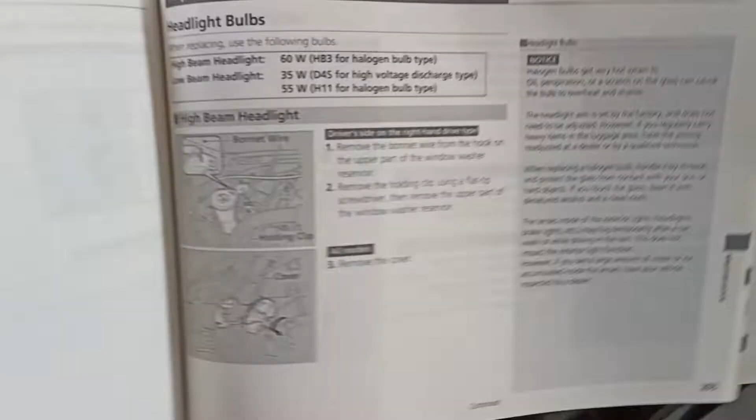Go to the Honda CR-Z owner's manual and turn to page 293, and there you have it.

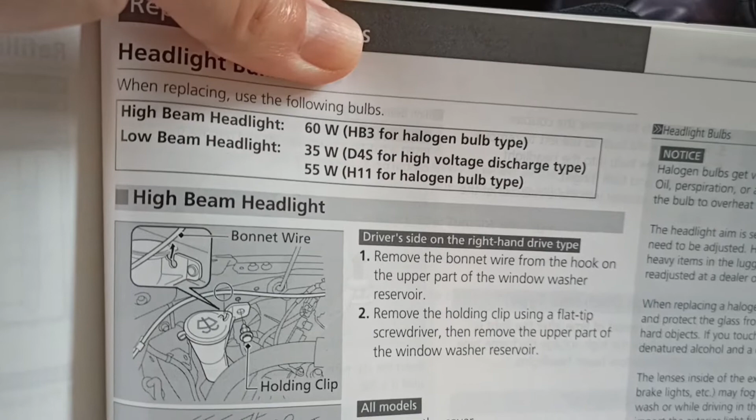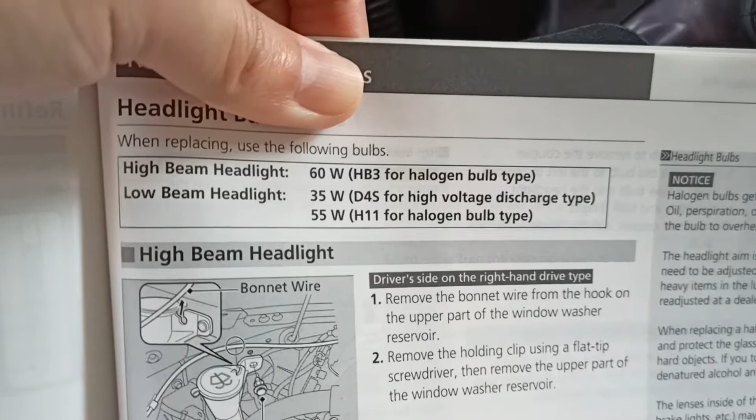The high beam uses the HB3, and of course this car has two models: ZF1 and ZF2. Currently I'm using the ZF2 version, which comes with HID, using the HID D4S.

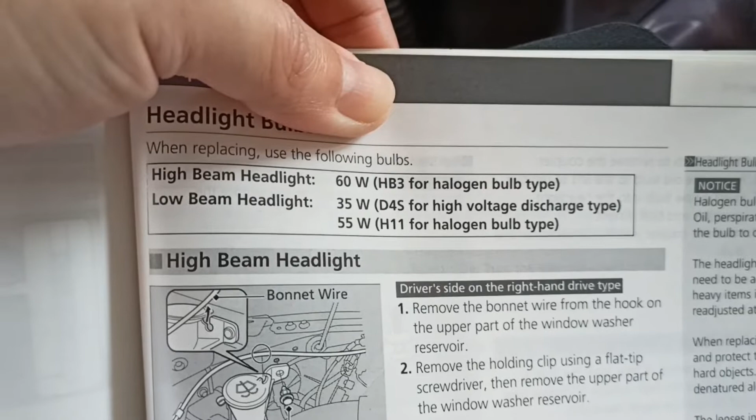The other version actually uses the H11 halogen bulb. Clearly this one is the D4S version.

The D4S version will look something like this. Let me turn on the light for you guys to see. So this is the type which uses the D4S, also known as the HID.

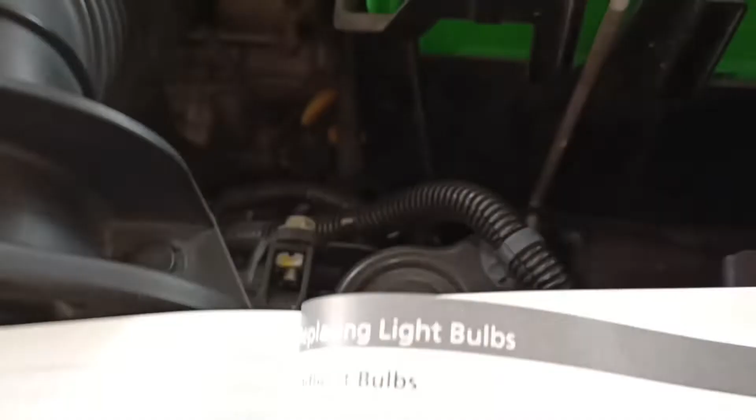So this is the D4S HID, and this is the normal bulb, as you can see, which uses the HB3, or the equivalent HB4, also using the same type.

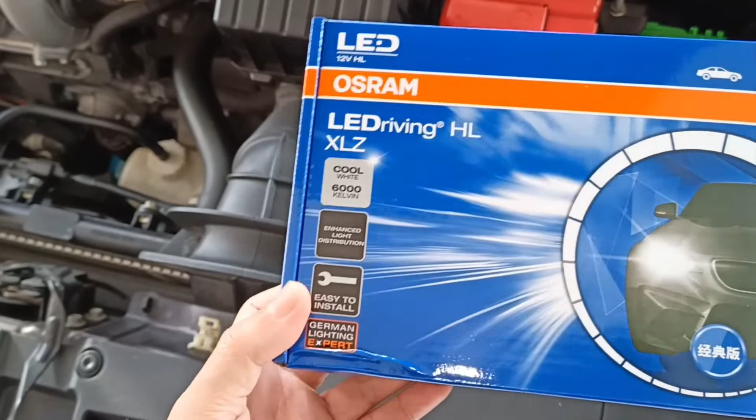Today the HB3 high beam light I will change to an LED. As you can see, this one is the HB3 LED. So currently the light is using, let me switch off the lights first.

It's actually using the bulb. As you can see over here, it's a bulb type, so I'm going to change it to an LED.

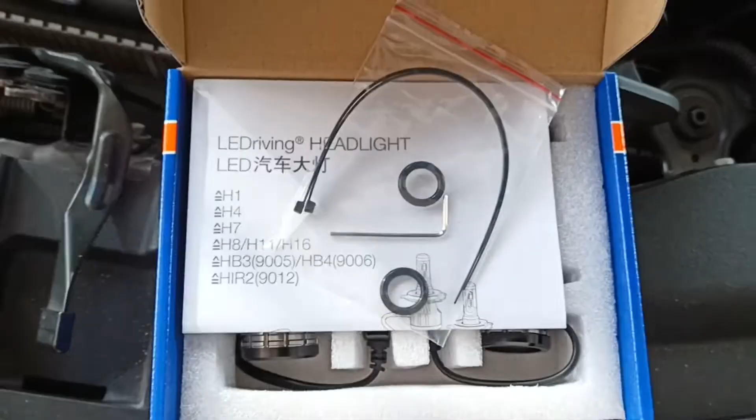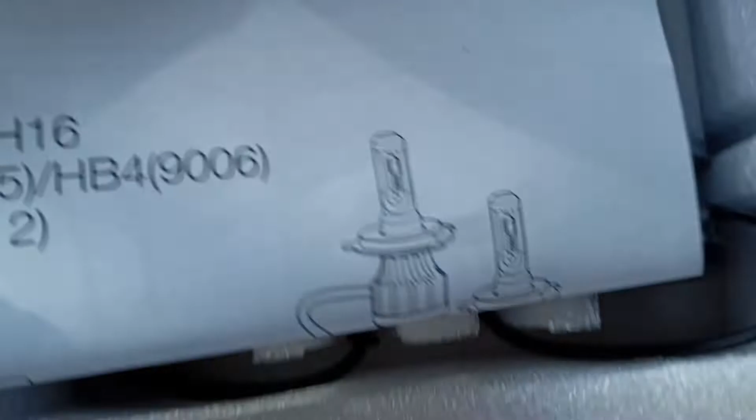To introduce the LED that I got over here, what's given is actually a cable tie, two O-rings, and an Allen key to adjust the location of the LED.

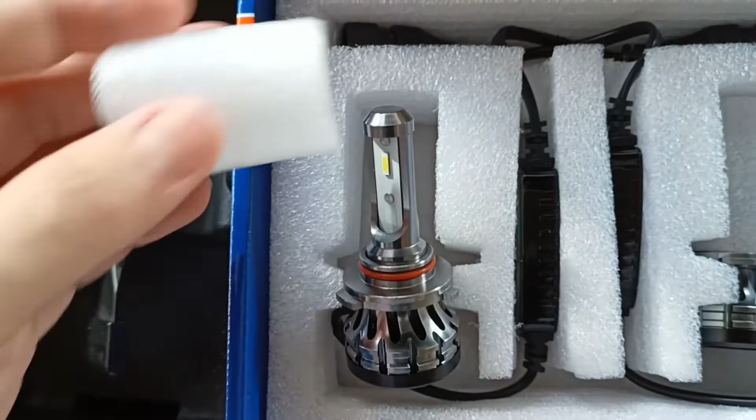Manual, and there you go. Very lovely LED, nicely protected. It comes with a ballast, and that will be the connector that they gave, which is hopefully a standard one.

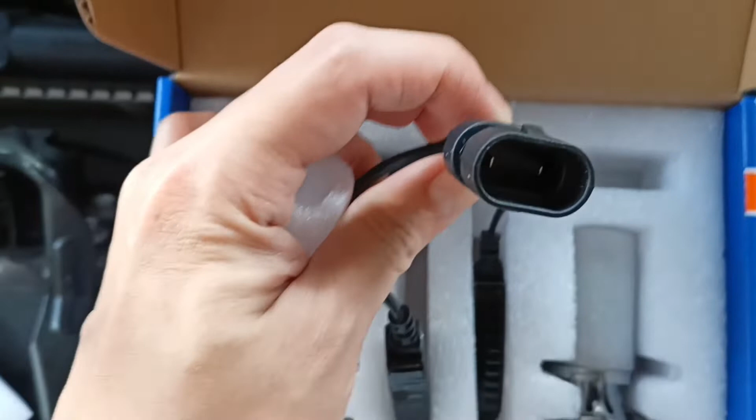Okay, step by step how to actually take out this high beam bulb. So go to here, this is one of it. The other side is actually more difficult.

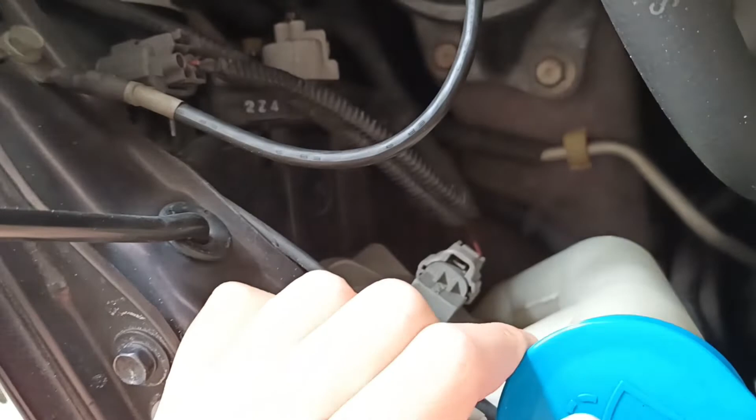This side you need to be taking care, since it's a right-hand drive car and it's quite near to this thing, so it's quite hard for you to turn, but we will do the video for this one, which is much easier.

Okay, by doing so, this is out, it looks something like that. Next what you're gonna do is turn counterclockwise. Okay, this is a better view. All you need to do is turn counterclockwise using this tab over here and here.

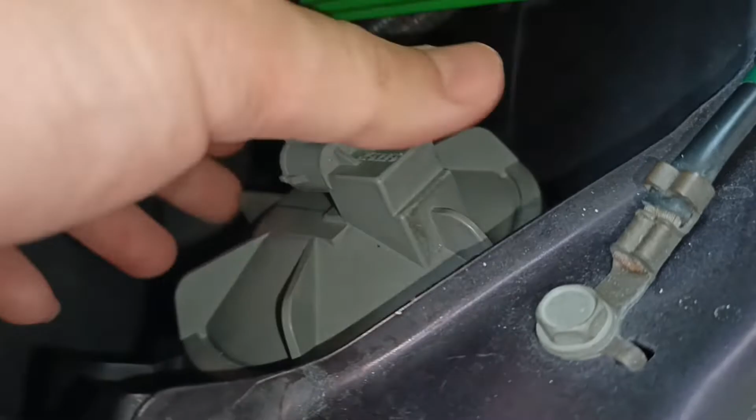Turn it counterclockwise, and then use the screwdriver that you have and give it a turn on the side.

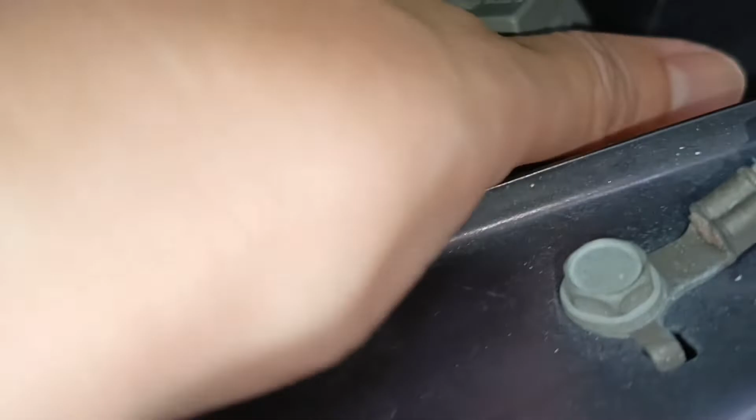Or if your hand has a better grip, what you need to do is just yank it up like that. Yeah, yank it up. So be careful.

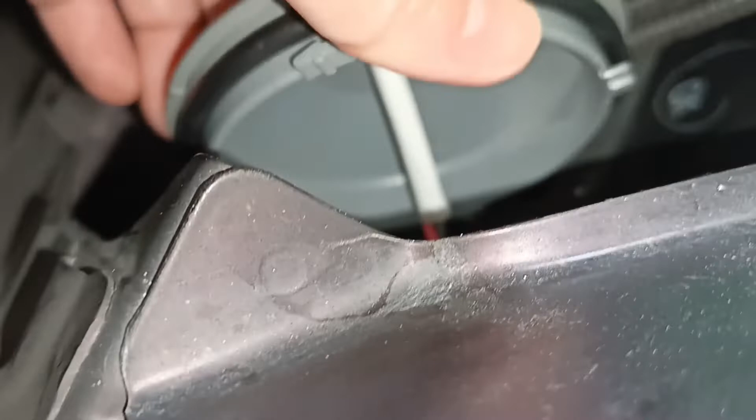There's a wire coming out over here. So let's say you yank it out, the wire that is red in color is connected to number 1 on the casing on this side.

Later I will show it to you. Okay, it seems that this wire is quite attached to the casing itself.

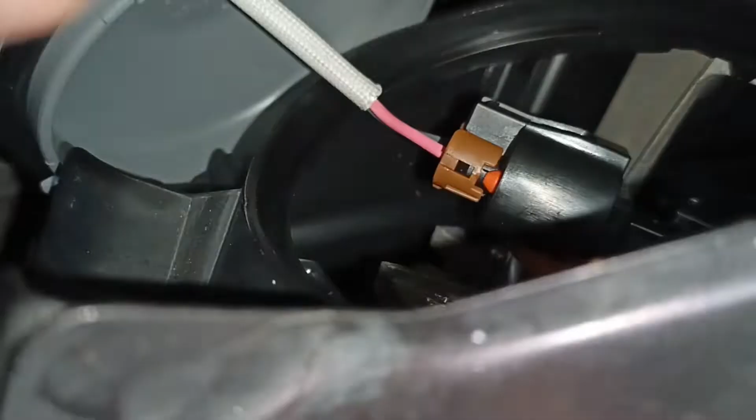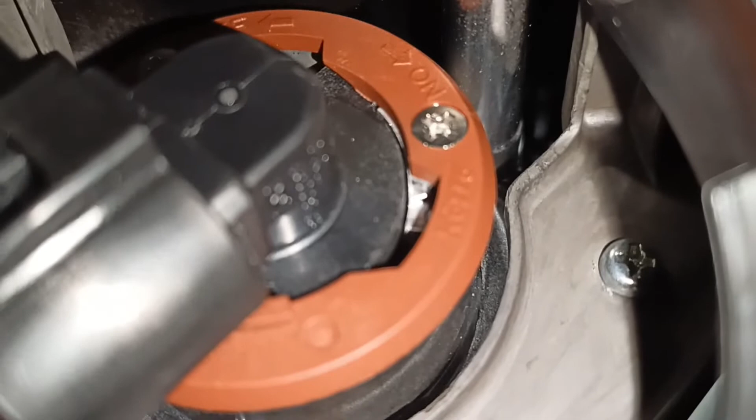So what you need to do is, for this bulb over here, as you can see, you can turn it counterclockwise as so.

Just turn counterclockwise, gently turn counterclockwise, and yank it out. Yeah, something like that. So there you go, the fitting is out.

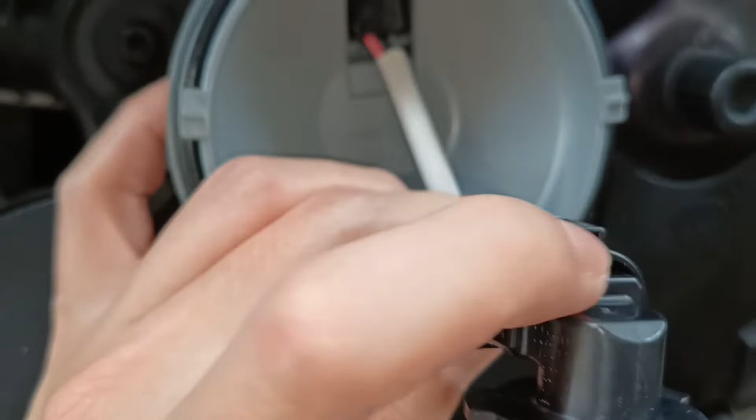Please don't take out this thing, keep it attached, because in order to take it out, same procedure as before, you need to put the screwdriver onto this slot itself before you can remove the bulb.

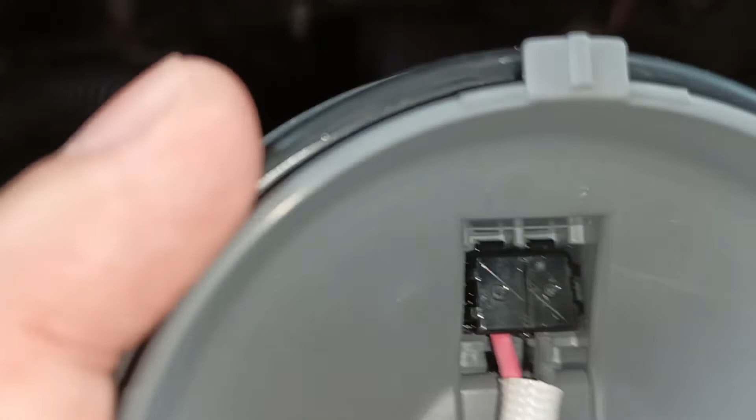As you can see, I mentioned the red wire needs to go to position number 1. Let me show it to you, position number 1. So remember that the red color cable needs to go to position number 1 on the casing itself.

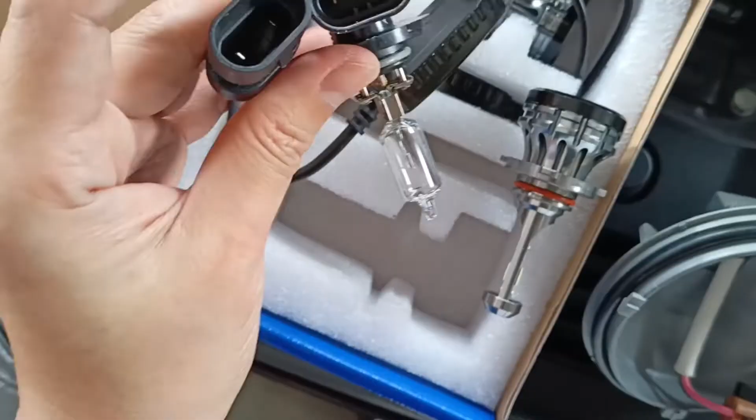Okay, just before you do the installation, you can see the connector for this bulb is actually the same as the one for the LED that you're going to change.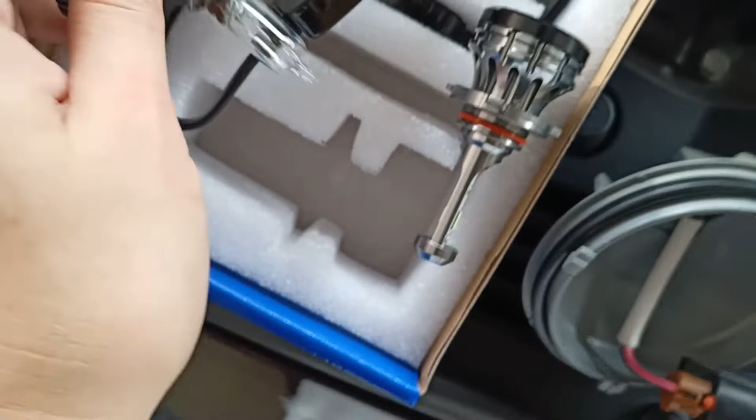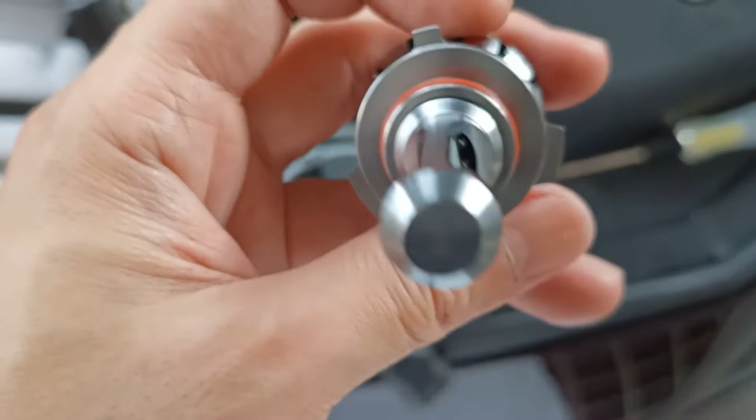Now you have to adjust the location for the LED. Ideally the LED needs to be aligned with the line of the housing.

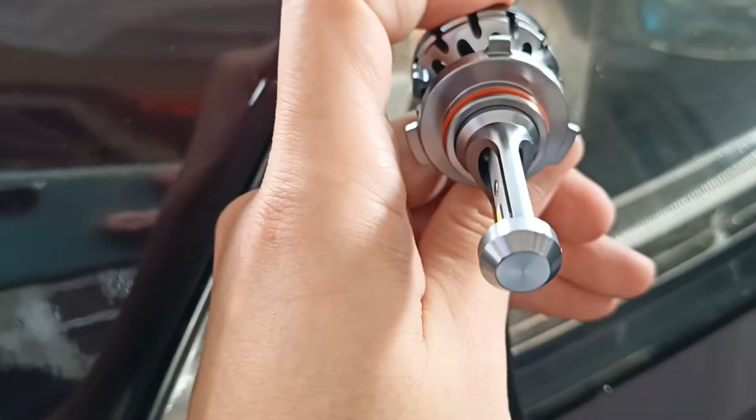Something like that. So you need to adjust this part over here, which they actually provided an Allen key for.

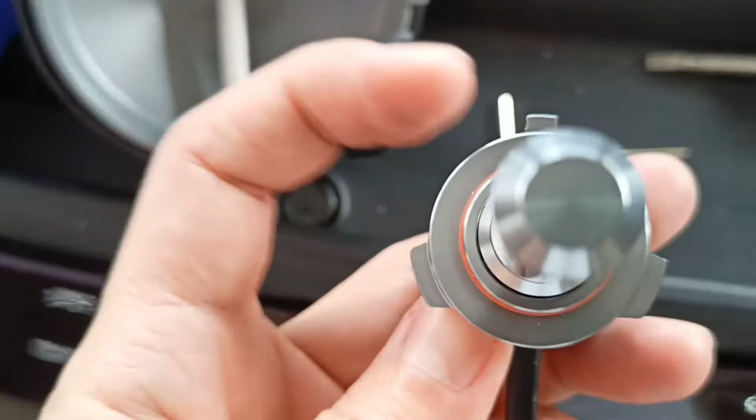This is the Allen key, and you adjust a set screw, sort of like a jam nut, over here. You turn it counterclockwise to open it, and you can turn this thing here exactly as per this one. Use this original bulb to find the location that you want, so that you can get this thing done.

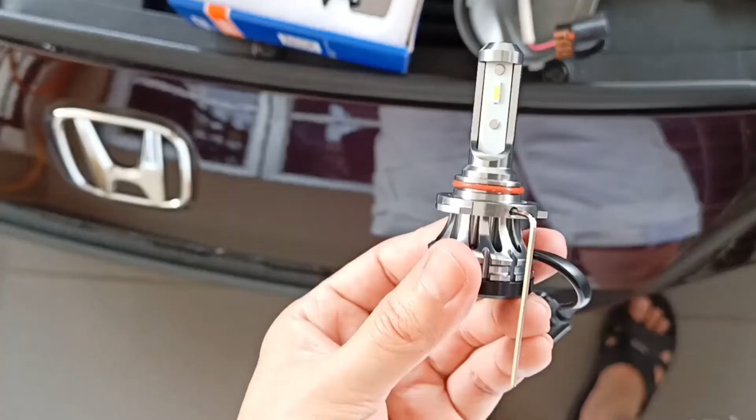Okay, I'll stop for a while and adjust it because I only have one hand. So finally I have adjusted the location. Using the Allen key, you need to lock the position like so.

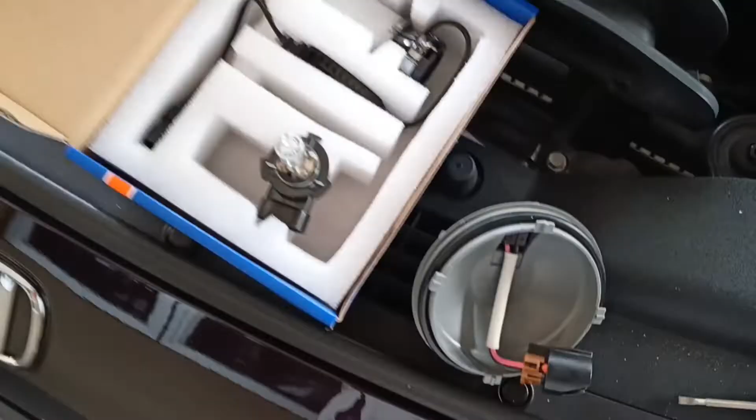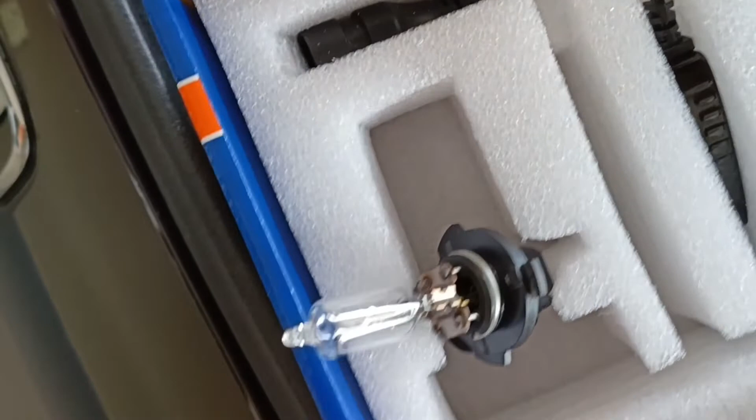So use the bulb that you have to adjust the location so that it will look something like that. So my current position is like so. You put it back inside and check the location.

Careful, don't spoil your LED lights.

Oh man. Put it back inside.

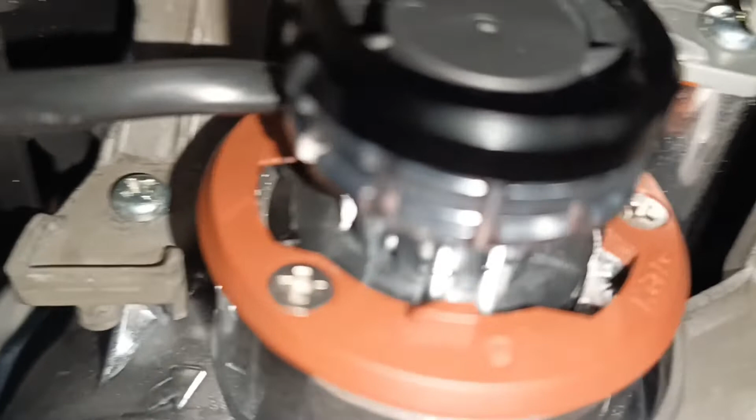Just need to use your feeling to actually see whether it's properly secured. Okay, so now there you go. So you can check. So it's inside already.

And also the location of the LED, so make sure it's straight like that. Same the line with over here, the top, like that, straight. Yeah.

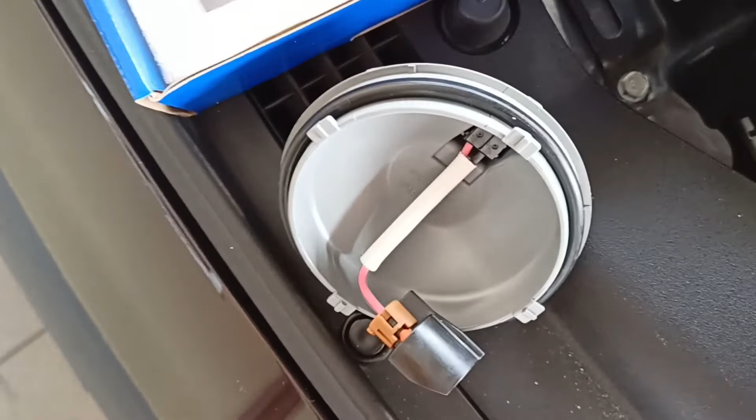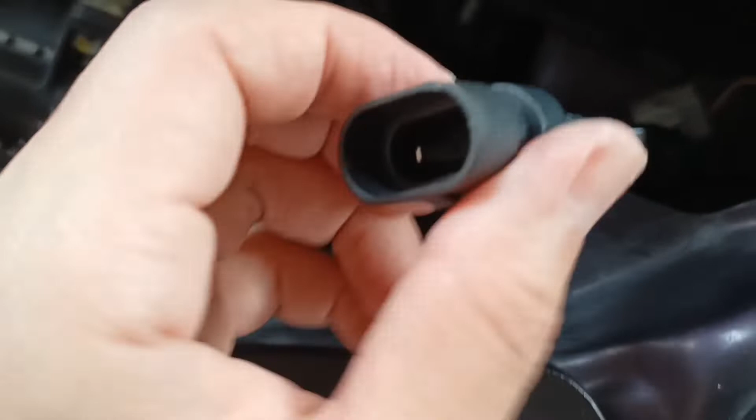In this orientation, you will be performing the best. Okay, so now you have this dangling over here. Connect it back over here and do the installation as how you opened it just now. Then you are done. Okay, nearly forgot, there is a polarity over here, so make sure the positive is actually connected to the number 1, which is the red color wire over here. Make sure this orientation you got it correct and everything will be fine.

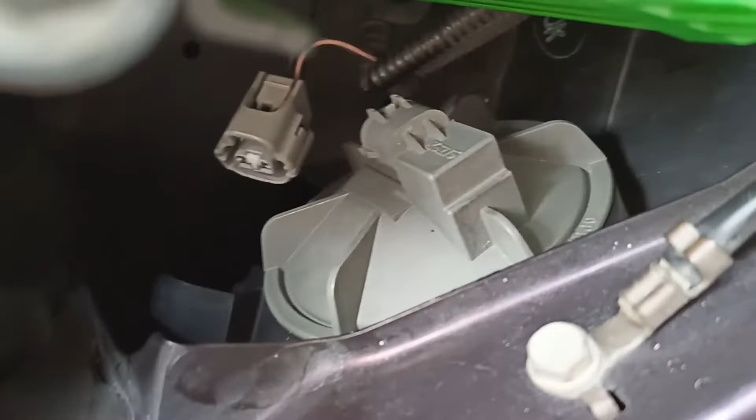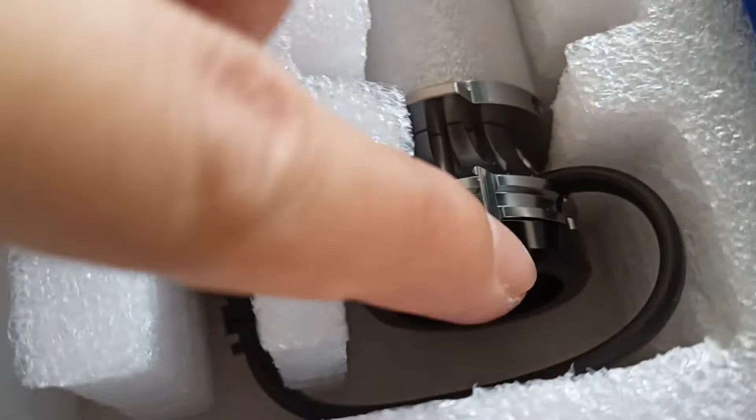Okay, I managed to put in the ballast and all the excess wire inside this thing, and you just have to reconnect this back, turn on the engine, turn on the lights, and see whether the wire actually interferes with the fan behind there. So this LED which has a fan over here, so you need to check that before you finish up with the installation, if the excess wire is actually getting to the fan itself over here.

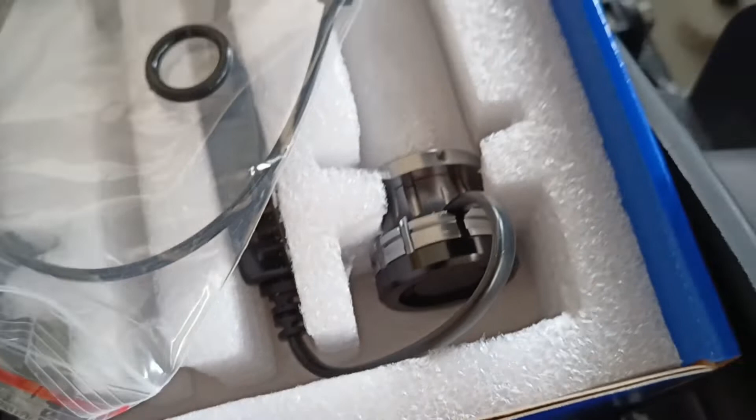So maybe you need to find a way to actually make sure the excess wire over here doesn't get to the fan blade of the LED itself, so you need to be careful. So that's all for the high beam installation.

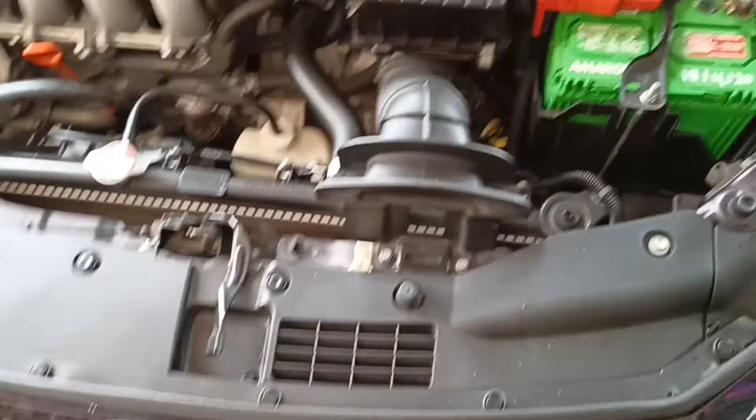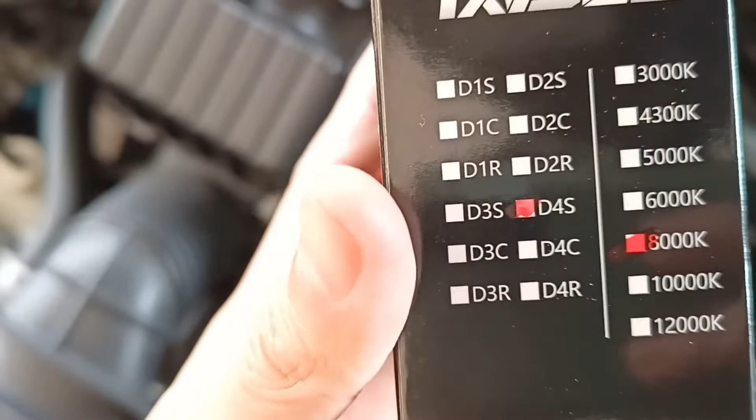So it's located somewhere here. I'm sure you can see that, or put some lights. So you need to reach over there, over here, and also the other one is here, all the way to this side over here. So I'll be changing to this HID headlight, which the size is D4S.

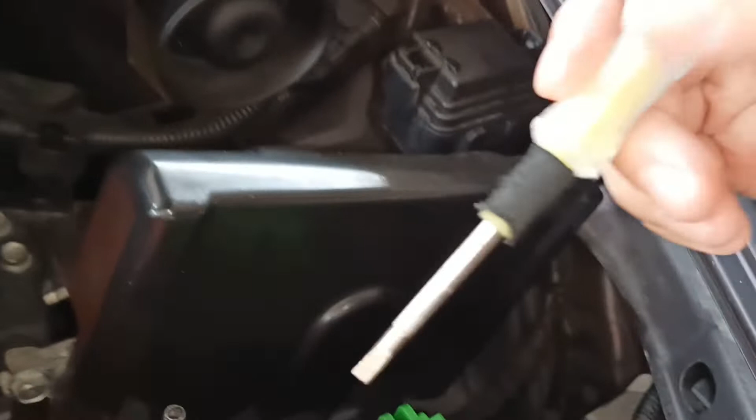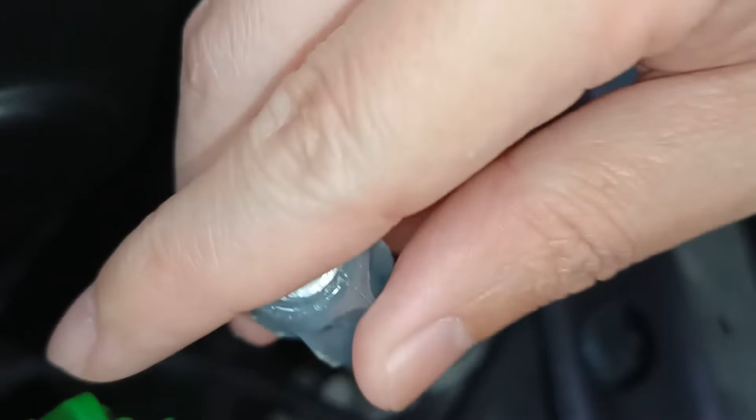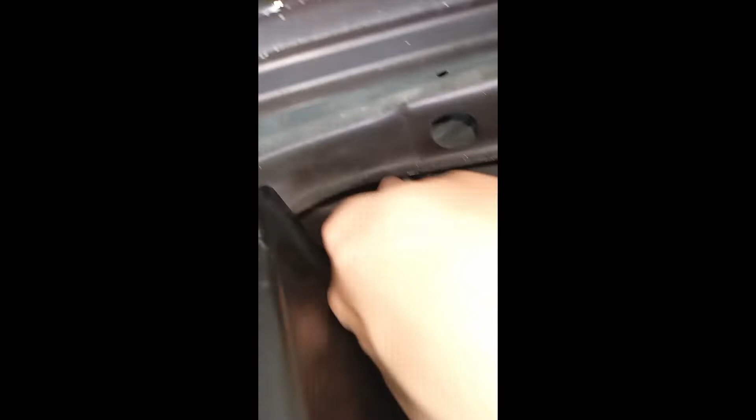8000K. Okay, step one, you have to turn the cap onto the counterclockwise, such as this. Make sure you have a small hand, and then you need a screwdriver to sort of turn it a bit. Not sure whether you can see this or not. Yeah, something like that. So you give it a turn like that, so it will yank it out.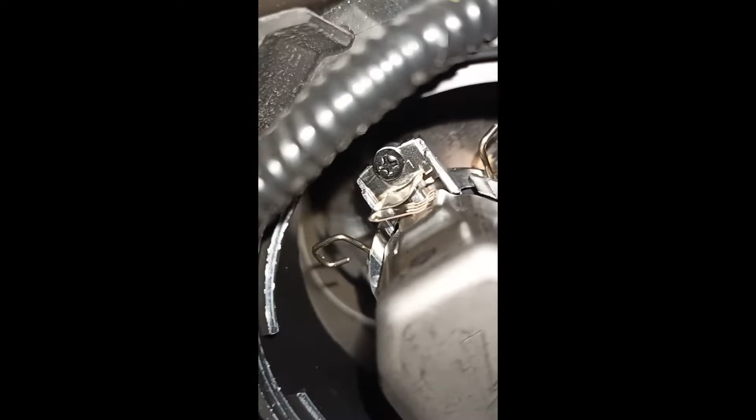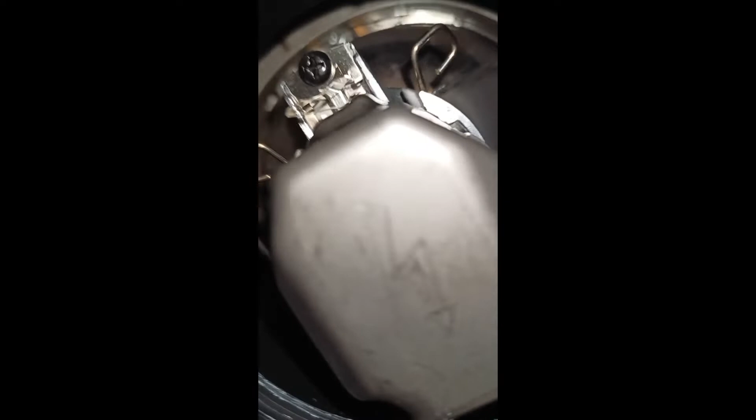We'll put it aside and then take a peek inside. So the inside will look something like that. You need to release the wire, which is restricting the HID lamp. But first you need to remove this thing over here by turning it counterclockwise, something like that. So turn that outer side anti-clockwise, turn it as so, such, turn anti-clockwise, and then you just give it a yank out. Yeah, so you see, there you go.

Okay, so inside is something like that. So you have to release that two hole by pushing inwards and then release out, something like that. Not sure you're able to see this or not. Something like that. And yank it out. Able to yank it out.

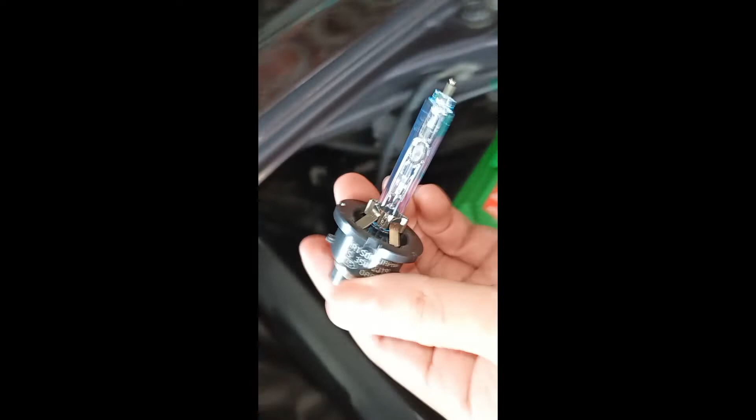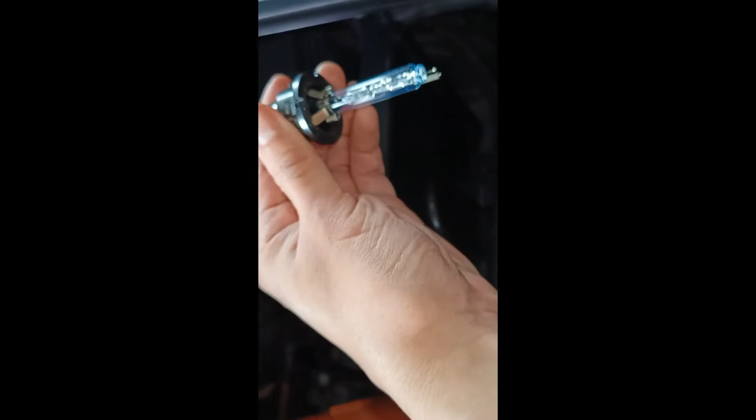So the position of the lamp, this is underneath. The wire here is underneath. Wire over here is underneath. So the orientation is in this way. Put it in this way.

This is properly installed. You can see the wire is already inside. And all you need to do is put this thing back. Just until you feel there's a click. There you go. Nicely installed over there.

Put the cap on. If your cap is kind of not lubricated, this O-ring over here, so all you need to do is take it out and do a lubrication with sort of like this, what they call it as a silicone spray, onto the O-ring, not on the cap. Just let me remove that O-ring out. Yeah, so this is the O-ring. Lubricate it, so the next time you take it out, it will be easier.